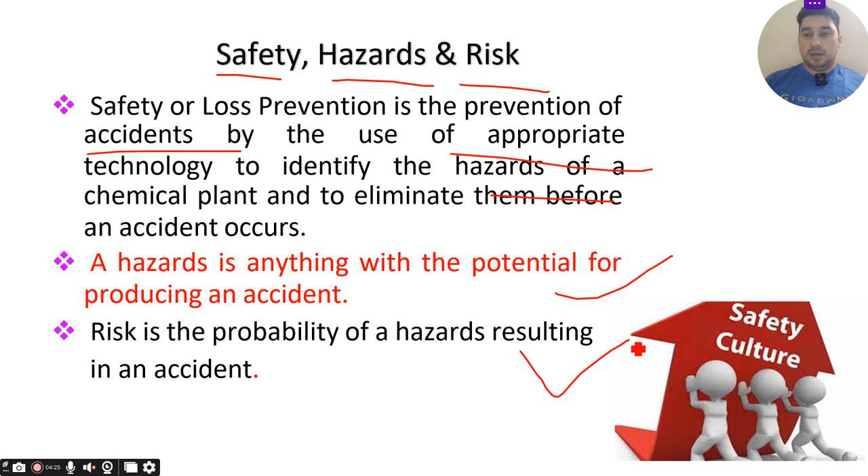In process safety management, hazard identification is very important. If you will not identify the hazard, then your process safety management will totally fail. So hazard identification is very important.

In process safety management, hazard identification is completely different from other industries like construction or aerospace. Hazard identification here refers to an inherent physical or chemical characteristic that has the potential for causing harm to people, environment, or property. Inherent means anything that, by its nature, by itself, is a hazard. So hazards are intrinsic to a material, or to its conditions of use.

Let's understand this with examples. First, inherent hazards like hydrogen sulfide. By nature, hydrogen sulfide is a toxic gas - when you inhale it, it's toxic. So by nature, it is hazardous. Second, moving machinery and equipment - by nature these have kinetic energy and pinch points, making them hazardous.

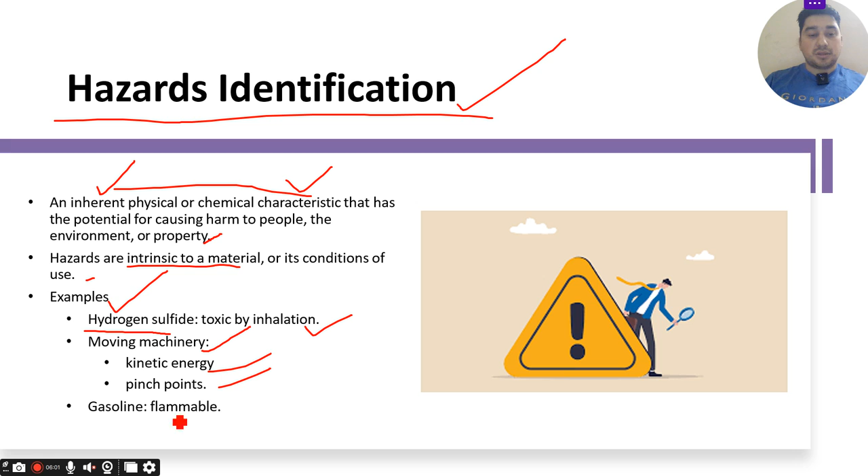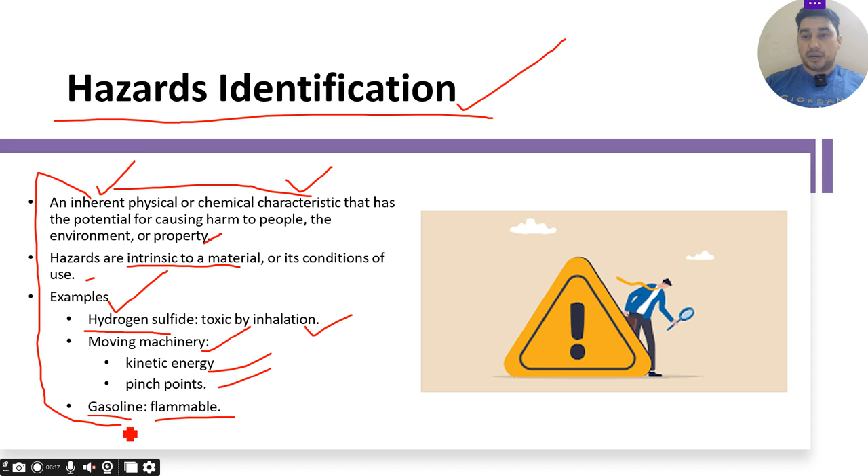Third, we have gasoline - by nature, it is flammable. So anything which is hazardous by nature is called an inherent physical or chemical characteristic that has the potential for causing harm to people, to the environment, and to property. That's called inherent hazard.

Whenever we do any process safety management related process, any industrial process, there are some questions you need to ask, and you need to be very specific about what you are asking, where you are asking, and how you are asking these questions related to the process. The first question is: what are the hazards? So you have to do the hazard identification, then answer these questions.

Once you identify the hazards, you have to understand the process - you have to read the process, you have to walk the process. Then you answer: what can go wrong and how, related to the process design and production process. Then, what are the chances, the likelihood, and the consequences? What are the chances the production process or equipment will fail? If this failure happens, what are the consequences - whether low, medium, or high?

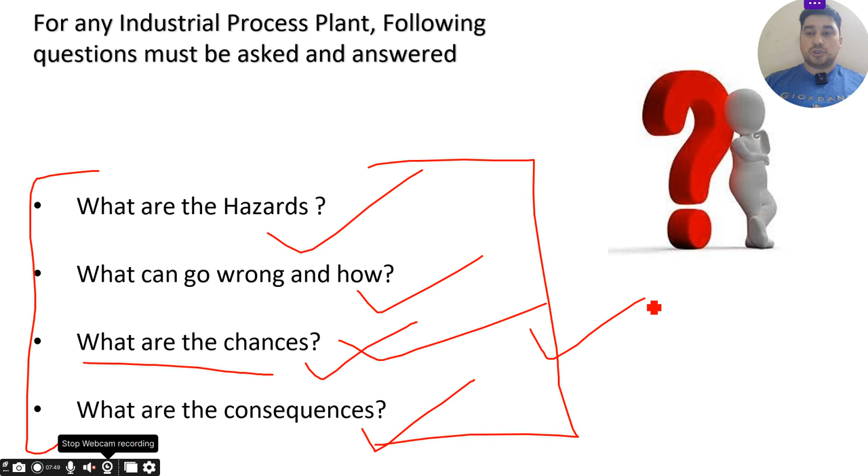Only then will you identify the answer to what the consequences are. So these are the four main questions you have to ask during process safety management - when doing any study related to process safety management, you have to get proper answers for these questions.

In process safety management, you also have to do a what-if analysis. Whenever you do this process safety analysis, you have to do it as a team - a single person can't do this. Just as with investigations or developing SOPs and manuals, you need a team, because you need expertise from different departments to give their inputs, ideas, and suggestions. Only then will you do proper documentation and process analysis. So in the what-if analysis, done by the team, you have to ask the questions and answer them too.

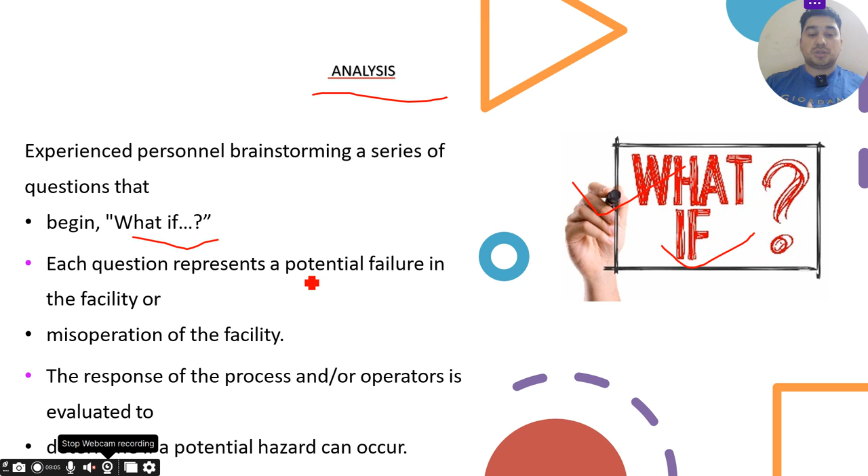You begin with 'what if.' Each question represents a potential failure in the facility, or misoperation of the facility or equipment failure, and the response of the process or the operator is evaluated. These are the things asked during the what-if analysis, in this way, whenever conducting one.

Related to equipment failure, you can ask: what if a valve leaks? What will happen? You have to go forward and ask different questions - what if the valve fails? If the valve leaks, what will happen? What are the consequences? What are the hazards? What are the risks? Those are the things you have to ask.

Moving forward, for human error related questions you can ask: what if the operator fails to restart the pump? What is the risk? What is the consequence? What is the likelihood and the severity?

All these things you have to check, and what control measures are in place already. Then the external events also you have to consider whenever you are doing the what-if analysis. External events are where you have very limited control or no control at all. So those are the external events.

So you can ask, what if a very hard freeze persists? If there is a snowfall, what will happen? If there is very high rain, if there is any flood, and that flood water went into any chamber, any pump, or any different kind of tanks, what will happen? So those things you have to check also.

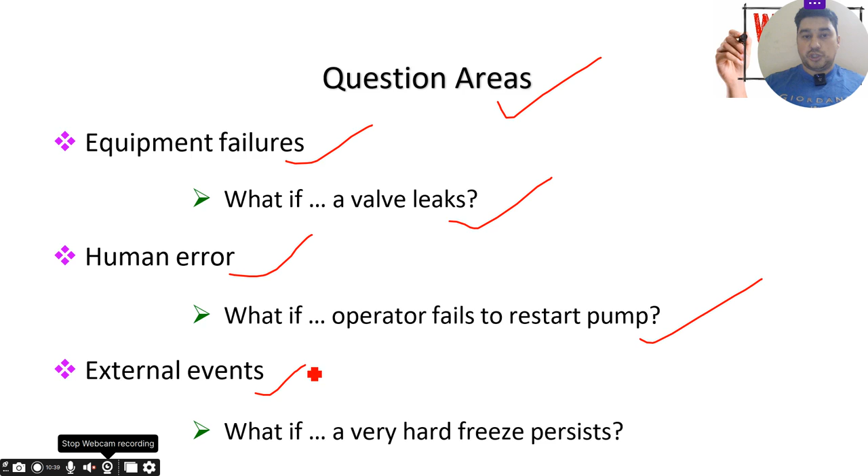So when we do the what-if analysis, it's related to the material, such as what if the raw material contains impurities, that also you have to ask. Then what if cooling water is lost? What if the vessel agitation stops? What if power supply fails? What if the temperature or pressure sensor fails? And what if the pump stops?

These are the questions you can ask in process safety management whenever you are conducting the what-if analysis. You have to gather as many questions as possible. The more questions you gather from the different teams, the safer your process will be. It will give you more shield and protection from the hazard and the risk related to process safety. So do not avoid the questions, get as many questions as possible. That is the key.

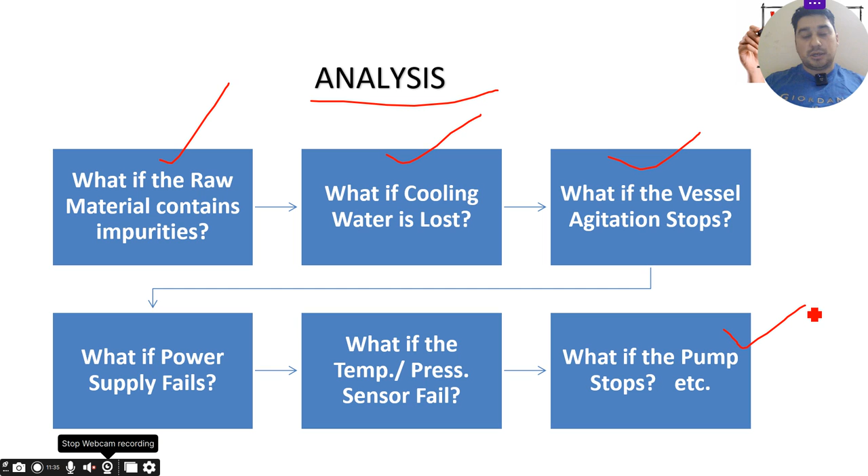So when we are conducting the what-if analysis, there are certain steps that you have to follow. First of all, divide the system into smaller logical subsystems. Why do we have to divide it? Because when you do the whole thing at one time, it will be very difficult. People will lose their scope, they will lose the goal of what they are actually trying to achieve. So that's why divide the things into different parts.

First try to solve one part, then move to the second, then the third and the fourth. In that way the work will look smaller, it looks easy, and people will interact also. So that's why we have to divide the system into smaller logical subsystems. After that, you have to identify the list of questions that you want to answer for that particular subsystem. Then you have to select the questions you want to take related to that particular system.

Then you have to identify the hazard. Then you will identify the consequences, severity, likelihood, etc., other things related to your process and the system. Once you identify all these things, you have to provide the control measures and recommendations to avoid such risk. Repeat steps 2 through 4 until complete. So from step 2, identify the list of questions, until step 4, until it is completed. For every process you have to repeat the same thing.

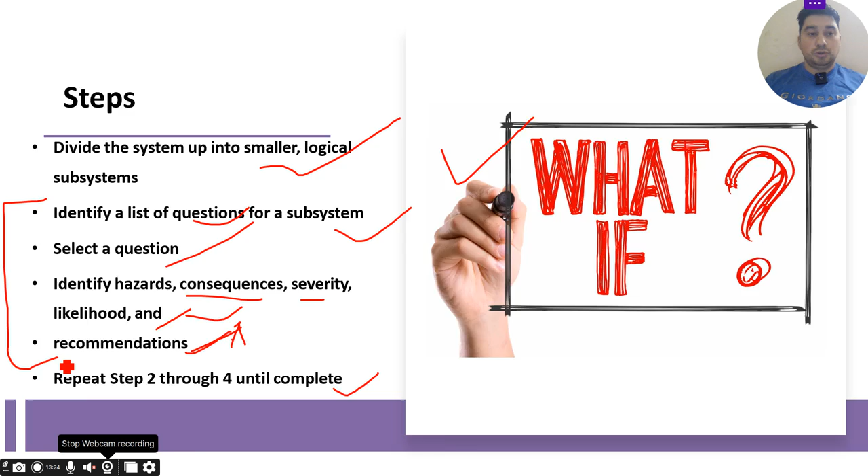HAZOP study is one of the main things that we have to conduct in process safety management. If you do not conduct the HAZOP study, then sorry, the process safety management is going to fail, and it will not work on the ground. So first of all, let's go to the definition. What is HAZOP, and what is the HAZOP study? So HAZOP, first of all, stands for haz...

Okay, HAZ means hazard, OP means operability, and study means study. So hazard and operability study is the full form of HAZOP. HAZOP study is a structured, systematic technique to identify the potential hazards related to operation and operability problems in industrial processes, particularly in oil and gas, chemical, pharmaceutical, manufacturing industries, and refineries. So there you can use this HAZOP study to identify potential hazards and operation-related problems in the industrial process. So that is the HAZOP study.

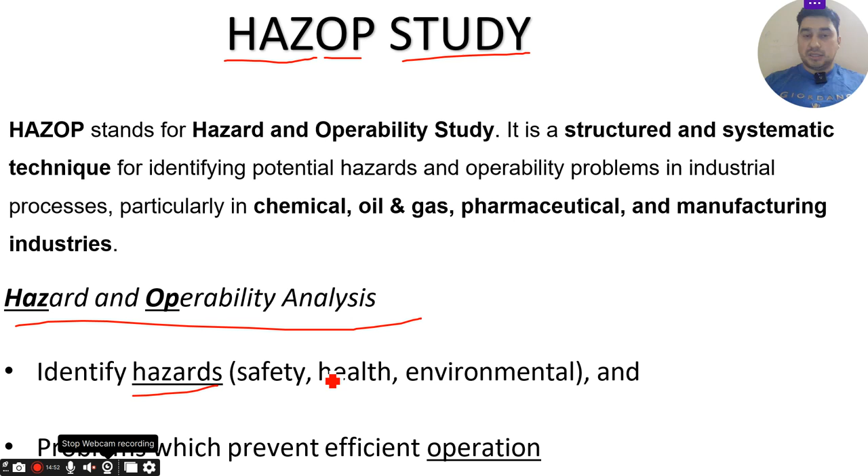So we have to conduct the HAZOP analysis also. In that one, we have to identify the hazards. The hazards will be related to safety, health, environment, and problems, which prevent efficient operation. So this study is related to the hazard. We have to conduct these things.

Safety programs. Safety regulations require some ingredients to have a proper safety program. Otherwise, the safety regulations and safety programs will not work. First of all, the persons working in process safety management should have proper knowledge. Let's say you are identifying a team and that team doesn't have any knowledge. They don't know anything about process safety, design, or maintenance, then sorry, you have selected the wrong team. Go again and select the proper team who has proper knowledge about process safety. Otherwise, don't select that particular person.

Then the person should have at least a basic understanding of safety. They should have safety experience also. That team member should be in your hazard study team. Then technical competencies you also have to get. A competent person should be there. Only the safety personnel cannot do the hazard study or process safety management, because the safety professional doesn't have the technical knowledge, information, and experience. That's why you have to get the technical person.

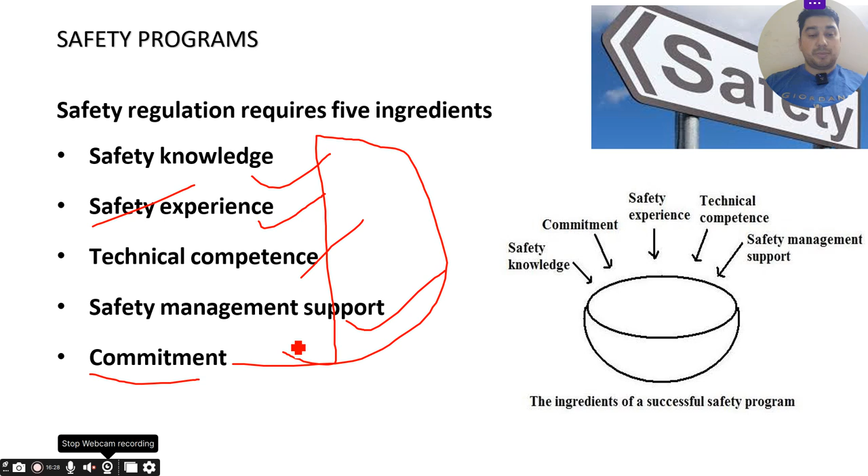Then safety management support also. You must get the safety professional in the process safety management. Then commitment, which is required from every person. If the commitment is not there from everyone, then your process safety management will fail. Nobody will work on it.

There are some scopes under the elements of process safety management. We have to make sure that we are compliant with these scopes. First of all, employee participation is required, very, very important. Each and every employee should participate. You have to get the view from each and every person. Only then will you get the actual picture of process safety management. Then process safety information also needs to be provided. Process hazard analysis: as I informed you, the what-if analysis or hazard study that we have to conduct. Operating procedures should be there. Then training needs to be provided for each and everyone.

Contractor safety also needs to be checked. If you do not include contractor safety in process safety management, then contractors might cause accidents and incidents that will not be controlled by process safety management. That's why I include them also. Pre-startup safety review is very, very important. Before starting any process, any machinery, anything, the pre-startup safety review is very, very important.

Then mechanical integrity and hot work permits. Every hot work should be controlled by a permit. I hope you remember the Piper Alpha incident, where the permit was not handed over to the second shift properly, and then the major incident happened over there.

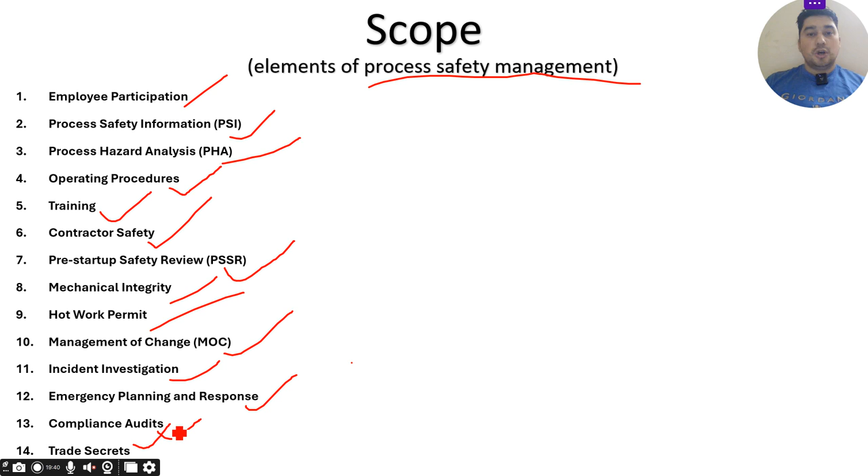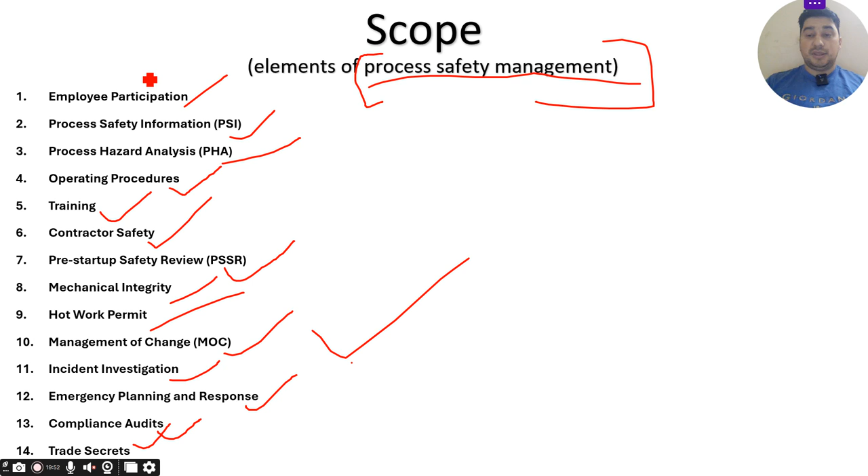So these are the scopes that we have to cover under process safety management. Okay, so when you are doing any process safety management, make sure you are not leaving any single point from these 14 points. These 14 points you should include under your process safety management scope. It's very, very important.

Features and characteristics of management system for process safety. Okay, first of all, planning is very, very important. Well defined goals and objectives you have to set before starting any process safety. You have to make sure of consideration of alternative achievement mechanisms, well defined inputs and resources; those requirements should be identified. Identification of needed tools and training, that you have to do under the planning section. What are the things you require to have a successful process safety management, that you have to do under the planning.

Then once you plan, you have to make detailed work plans, specific milestones for accomplishments, initiating mechanisms. So you have to implement those things. Once you implement that, you have to have strong organizing: a strong sponsorship, clear lines of authority, who will do what, what authority they have, what roles and responsibilities they have, such as a JD. So a separate JD you have to create under the process safety management, for what they will do.

Then explicit assignment of roles and responsibilities: what they will do, how they will control, whom they will report to; everything should be there in their roles and responsibilities. And the internal coordination and communication: how there will be internal coordination and communication, whom they will communicate with, whom they will coordinate with; everything should be included in that.

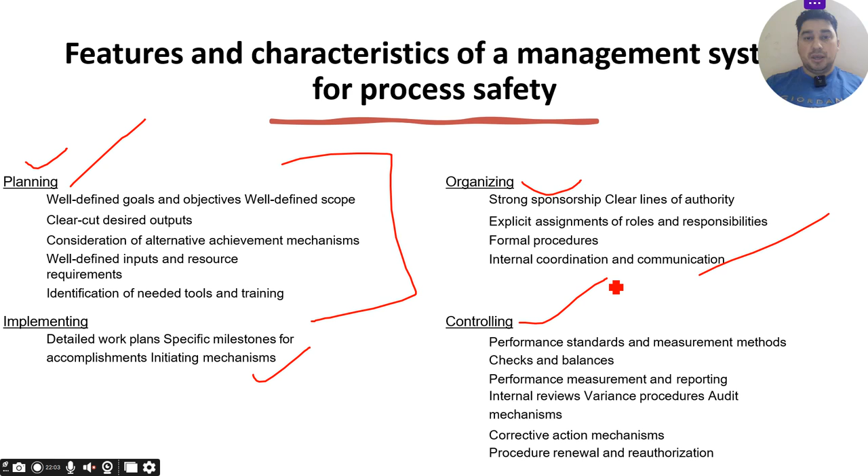After that, at the end, you have to control this full process. How are you going to control this? Performance standards, measurement methods, check and balance, audits, inspections, safety reports, third party audits, second party audits, performance measurement and reporting, internal audits, KPIs; so many things could be there. Corrective action, preventive actions, and procedure renewal, reauthorization. So by these four things, planning, implementation, organizing and controlling, you will control the process safety management.

So safety programs are related to chemical disaster. There could be two different types: one is biotic environment and the second one is abiotic environment. When there is a chemical disaster related to the biotic environment, it will cause death to humans, livestock and plants. These three things will be affected: death, injury, disease and disability.

You remember the Bhopal methyl isocyanate gas tragedy, which happened in 1984. There, you have seen that there was death of humans, there was injury also, and there was disease also, which is still there. Humans died, livestock died, plants also died. It is related to the biotic environment.

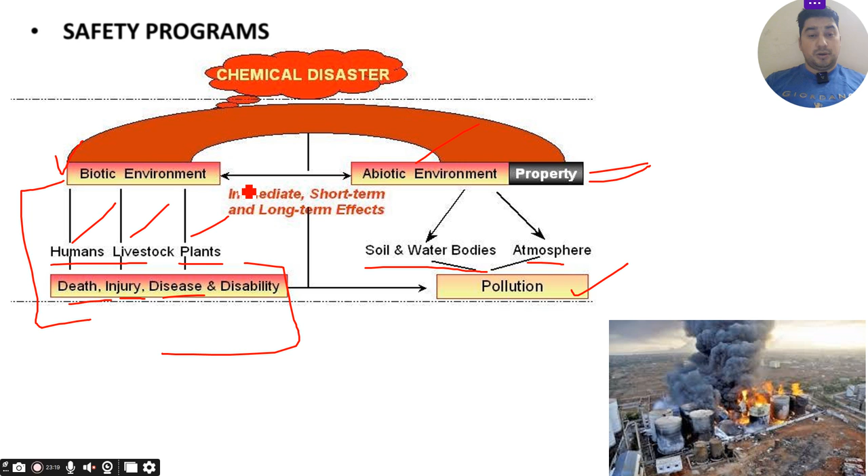Then we have the immediate abiotic environment. It will only cause hazard to properties such as soil, water bodies and atmosphere, and it will cause pollution only. So for the biotic environment, immediate short term and long term effects could be there. Okay, biotic and abiotic both.

So there are so many incidents and accidents, but before any incident or accident, each and every person thinks that yes, we are safe and nothing will happen to us. But there are so many incidents in history which taught us that no, we were wrong, and we haven't controlled our risk and hazard properly related to process safety, and that's why it caused so many incidents in the past, and which is still going on.

So good companies can be lulled into a false sense of security. As I told you, they can have misperceptions that yes, my safety system is very good, up to the standard, it is top notch, and nothing will happen to us. So that is a false sense they have.

So that is the main cause of incidents and accidents, when people don't accept and when they don't go deep to investigate or try to find out the problems in the system. Then they may not realize how vulnerable they are to a major accident until it has happened. As I told you, until it has not happened, everyone thinks that it is safe and nothing is going to happen to them. So subsequent investigations typically show that there were multiple causes, and many of these were known long before the event.

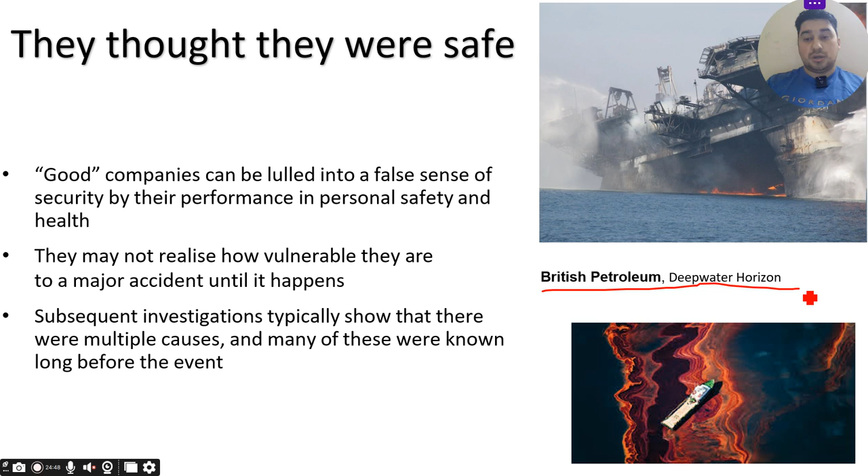You remember British Petroleum Deepwater Horizon? That is one of the major oil spills, and there were so many accidents there. So you can see this one.

Why and how does defense fail? This is a very, very important question. So people often, as I told you, assume that systems work as intended despite warning signs. They don't take care sometimes. Examples of good performance are cited as representing the whole, while the poor ones are overlooked, or soon people forget it. They will not learn the lesson.

Okay, lesson learned is very, very important from the past. Past has taught us so many things, but still people forget about their past. Analysis of failure modes and effects should include human and organizational aspects, as well as equipment, physical, and IT systems. So that should be included in the defense system.

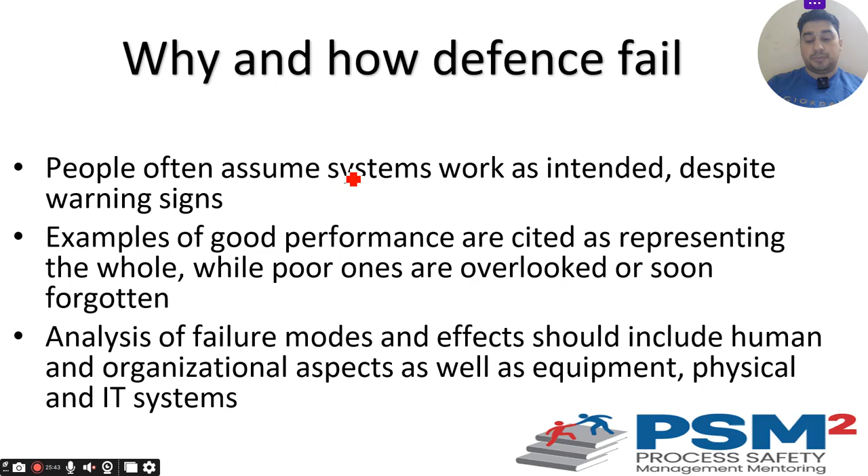So process safety management means recognition of seriousness of consequences and mechanisms. That is very, very important, which we have to identify during process safety management. And many of the key decisions influencing safety may be beyond the control of the worker or even the site. They may be made by people at another site, country, or organization. So this is a typical problem in safety.

Sometimes people conduct risk assessment in one site and implement that risk assessment in a different site. So that can also happen in process safety. People can sit in different offices, different areas, and do the process safety management, design, evaluation, and so many other things. So that is a very, very wrong thing that should be avoided.

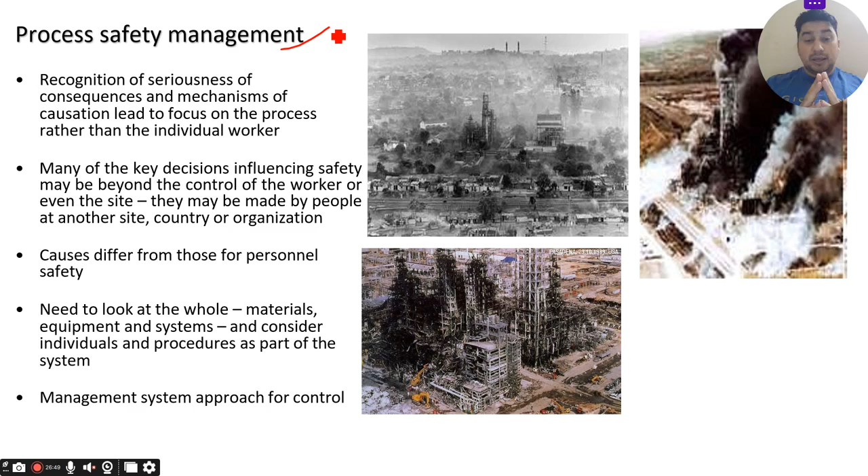So it will differ from personal safety, and we need to look at the whole. You should not look at only one thing in process safety. You have to look at everything: material, equipment, systems, people, everything. Then a management system approach for control needs to be implemented to control process safety related hazards.

The most effective means of implementing a safety aspect is to make it everyone's responsibility in a process plant. Not only one person should take responsibility for process safety; each and every person should take their own responsibility. They should own the safety. So the culture needs to be changed.

Very, very important. The older concept was identifying a few employees to be responsible for safety—that is not going to work. So you have to make sure that all employees have the responsibility regarding safety, process safety. Everyone should take the responsibility, and it is very, very important to recognize the distinctions between a good and an outstanding safety process.

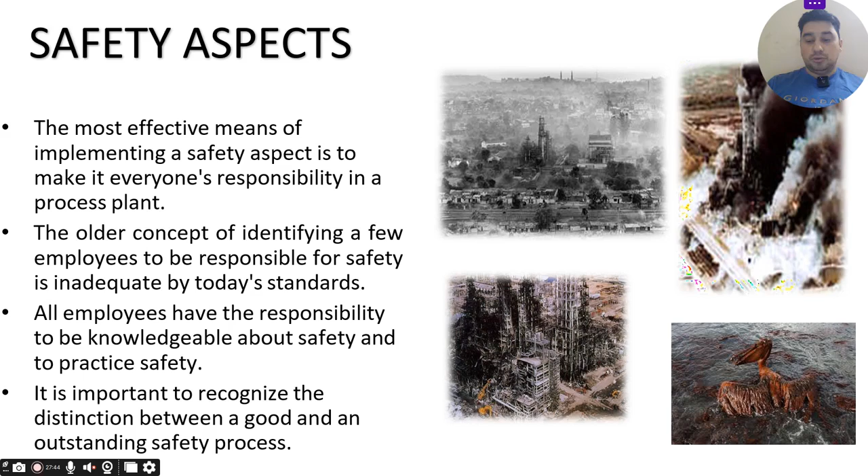Only good is not enough, we have to go for outstanding. That is what we have to do under safety aspects. A good safety process identifies and eliminates existing safety hazards. An outstanding safety process has a management system which prevents the existence of safety hazards.

This is the difference between good and outstanding safety process. A good safety process will identify and eliminate existing safety hazards. That is good safety practice. But if you want to achieve an outstanding safety management system, it will prevent the existence of safety hazards in the first place, avoiding them entirely. That is the key difference.

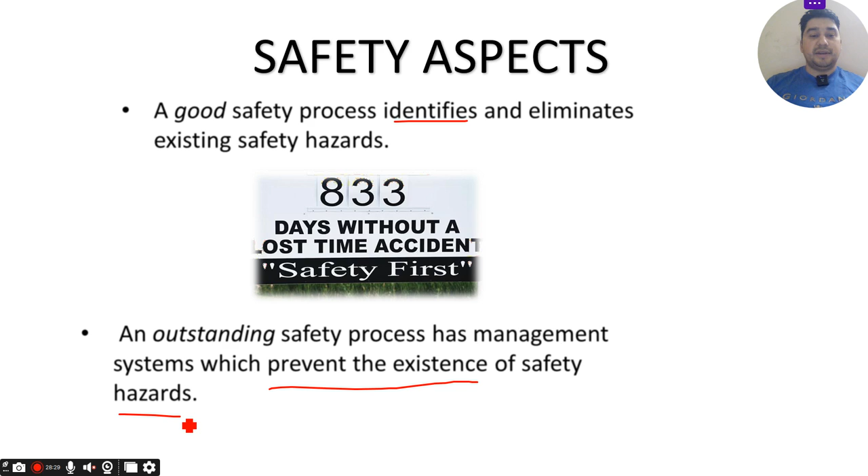Process safety is related to inherent safety, as I told you, related to inherent hazards. Then hazard identification and risk assessment need to be done. So these three things are included in process safety.

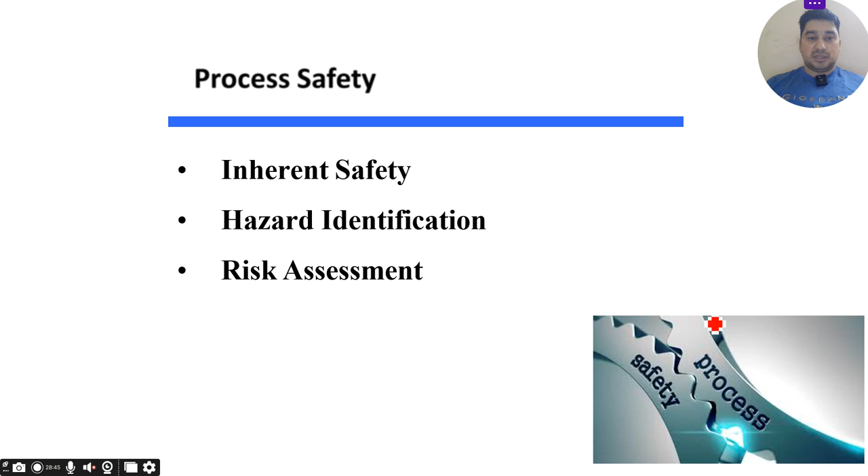Inherently safer process means reduction or elimination of hazard related to the process. This reduction or elimination is permanent and inseparable from the process, which is very important under inherent safety. For example, use a less toxic raw material to produce a product rather than using a highly toxic or highly flammable one.

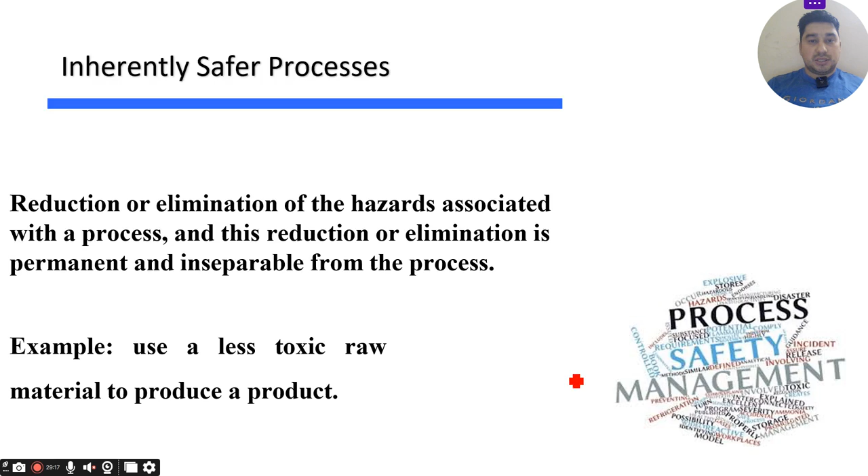So substitution is what you have to get under the inherently safer process. You have to make the process safe—inherently safer process you have to do. I hope you remember about the hierarchy of control.

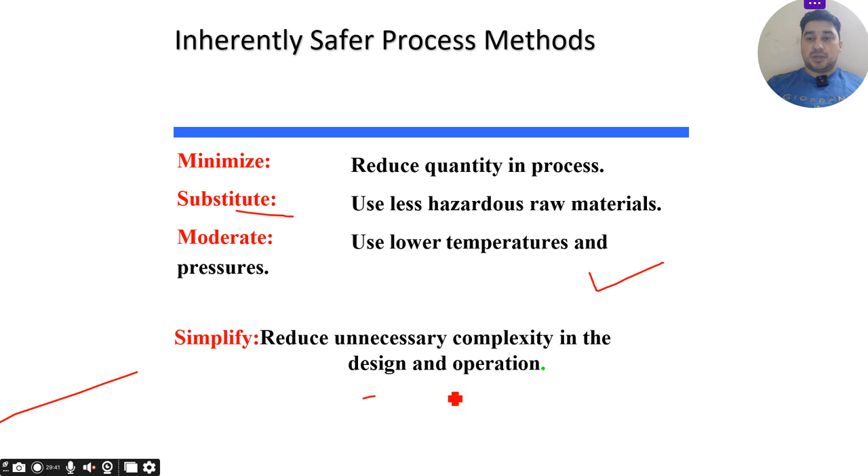Similarly here, we have to minimize, reduce quantity in process. Then substitute, use less hazardous raw material; moderate, use low temperature and pressure. Then simplify, reduce unnecessary complexity in the design and operation. These are the kinds of things we have to use in inherently safer process methods.

Then we have hazard identification versus risk assessment procedures. Hazard identification methods remain similar in type. We have to use the process hazard checklist under process safety, conduct a hazard survey, do a hazard study like hazard and operability study, and conduct a safety review.

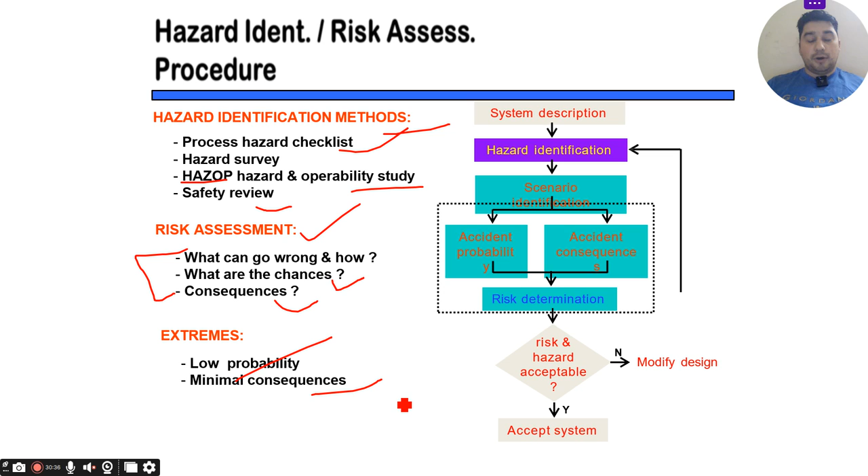When conducting risk assessment, you have to ask: what can go wrong, and how? Remember these questions asked earlier. What are the chances of those things going wrong, and what are the consequences? You have to check that under risk assessment. For example, low probability with minimal consequences could be one case. You can check it this way also.

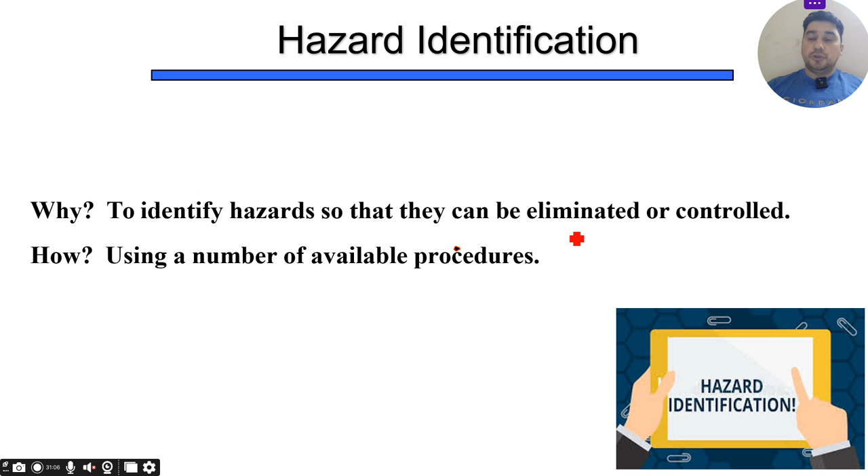Hazard identification is very, very important. But why is it so important? If you will not identify the hazard, what will you control? Simple question, right? If you will not identify the hazard, you will not control the accident or incident. That's why you have to identify the hazard—very important—so that it can be eliminated or controlled. How can you identify it? Using a number of available procedures that you have.

Let's go to the accident process. Most accidents or incidents follow a three-step sequence. First is initiation—the starting process of the accident. In this stage, the accident hasn't happened yet; it is just starting.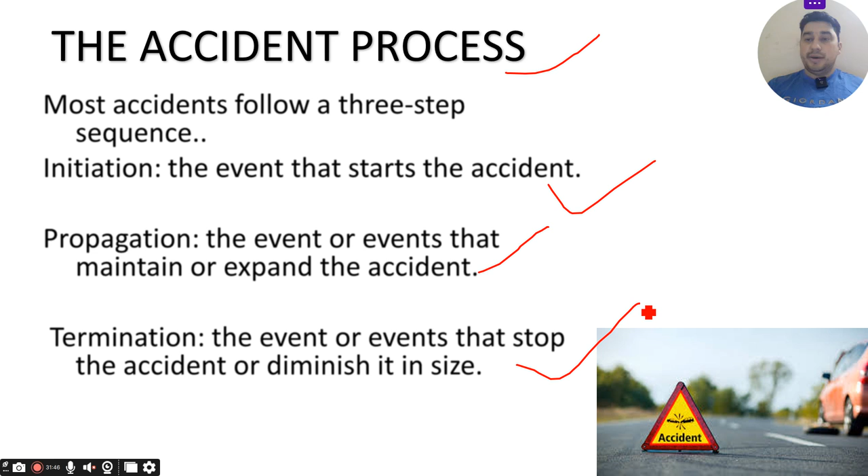The second process is propagation—the accident or event has already happened and is now progressing. In propagation, the accident will go from worse to worse. Then we have termination, where the accident stops—the event or events that stop the accident or diminish its size.

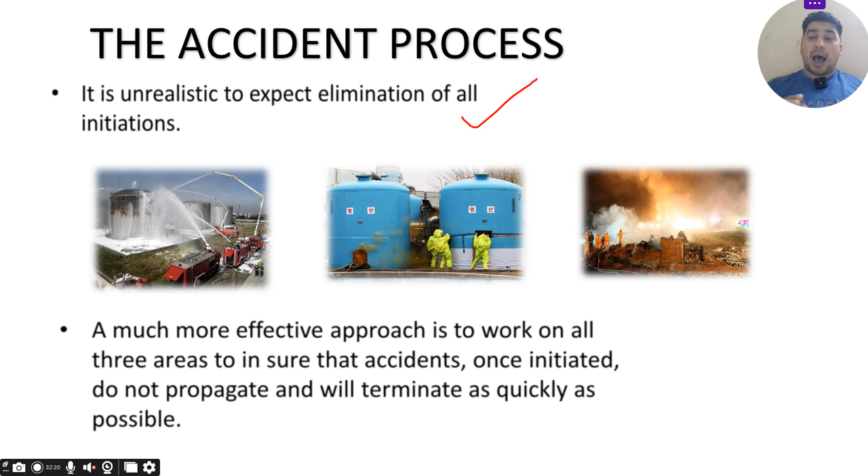In the accident process, it is unrealistic to expect elimination of all initiations—we cannot avoid all initiations. A much more effective approach is to work on all three areas to ensure that accidents, once initiated, do not propagate and will terminate as quickly as possible. All accidents cannot be avoided, but if one happens, how can you avoid it or reduce its consequences? That is the main thing we have to concentrate on.

So, defeating the accident process—do you remember the movie Final Destination? In that movie, one of the survivors of the accident tried to save people by defeating the line of death.

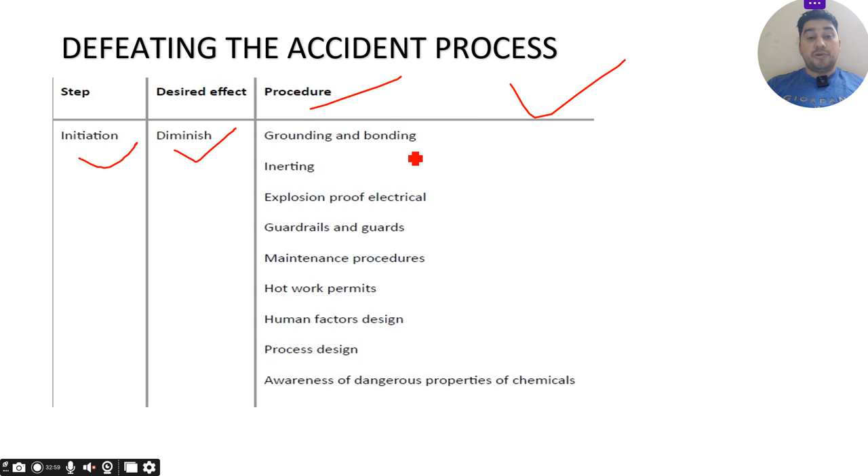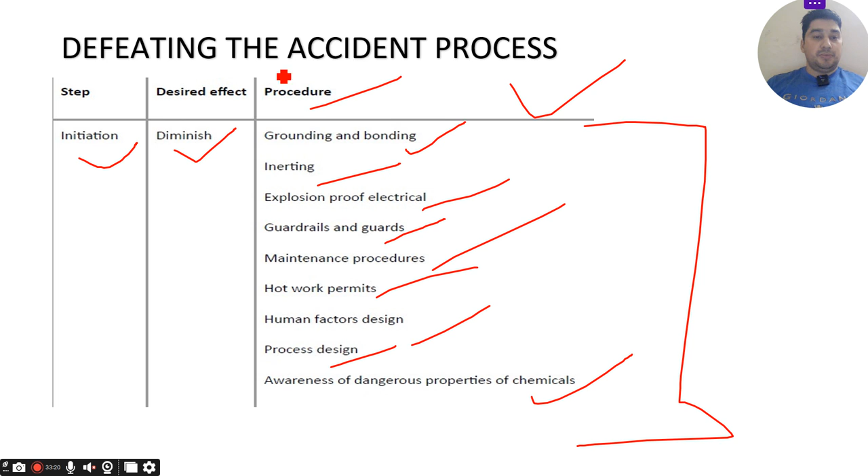So in a similar way, you can imagine here. First of all, initiation. Let's start with the initiation process. The desired effect is to diminish it. So the procedures we can use include grounding and bonding, which is very important, inerting, explosion proof electrical, guardrails and guards, maintenance procedures, hot work permits, human factor designs, process design, and awareness of dangerous properties of chemicals. These are the procedures used in the initiation step.

Then the second step is propagation, and the desired effect is again to diminish it. Procedures for propagation include emergency material transfer - during an emergency, if there are 1,000 kg of flammable gases in a store, how do you remove them safely. Also reduce inventories of flammable materials, equipment spacing and layout to segregate equipment so one hazard doesn't transfer to another, non-flammable construction materials so fire doesn't spread, and installation of check and emergency shutoff valves. These are steps you can implement during propagation so the accident doesn't get worse or spread further.

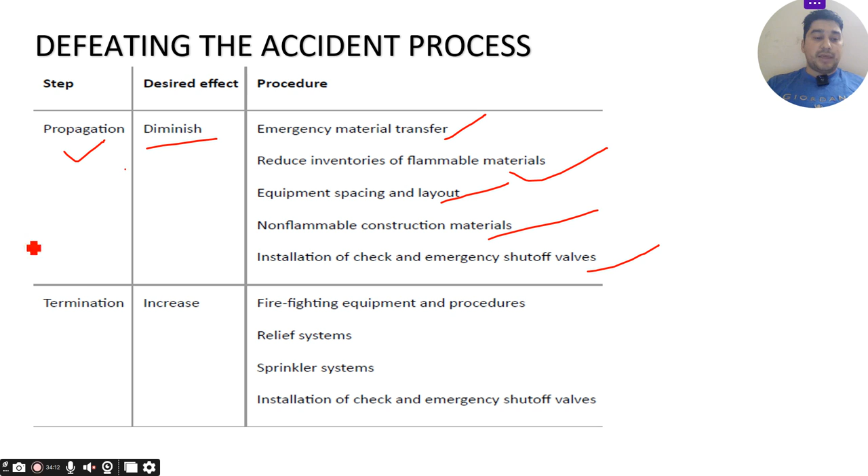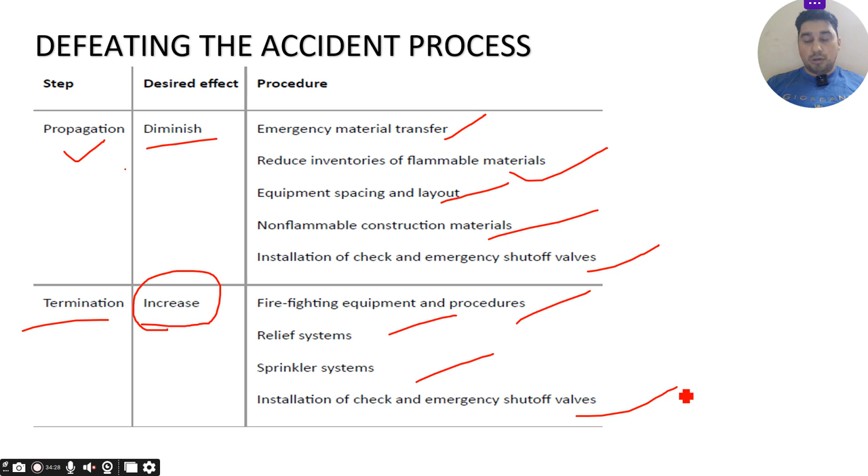Then we have termination. The termination effect needs to be increased. Termination means avoiding or stopping the accident - firefighting equipment and procedures, relief systems, sprinkler systems, and installation of check and emergency shutoff valves, which act during an emergency to stop any fire or emergency at that time.

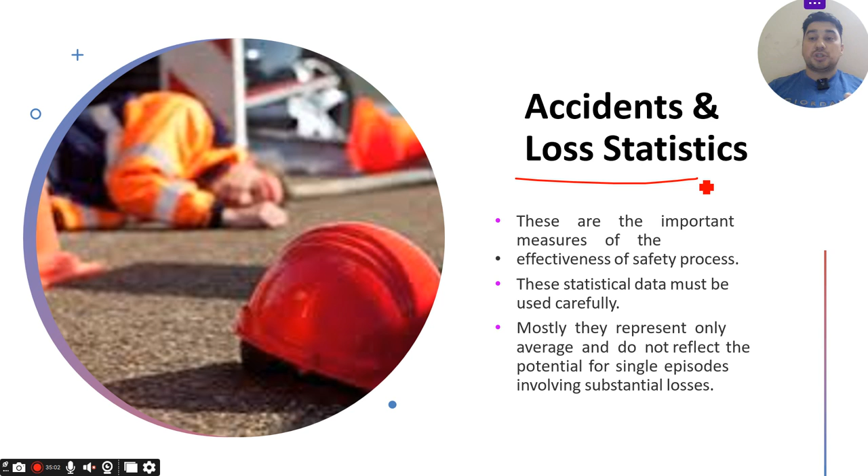Accident and loss statistics are very important. As I told you, we have to look at the past accidents and statistics - these are important measures of the effectiveness of a safety process. These statistics and past accidents can teach you many things, so we need to look at them carefully and identify them. Mostly they represent only averages and do not reflect the potential for a single episode involving substantial losses. You have to keep that in mind.

So how do you get accident and loss statistics? There are measure systems such as OSHA incidence rate, fatal accident rate - we have to count these too - and OSHA fatality rate, or deaths per person year. These are statistics we have to count as well. There are also some different statistics in the HSE, which I will talk about in a separate video that I will upload on my channel.

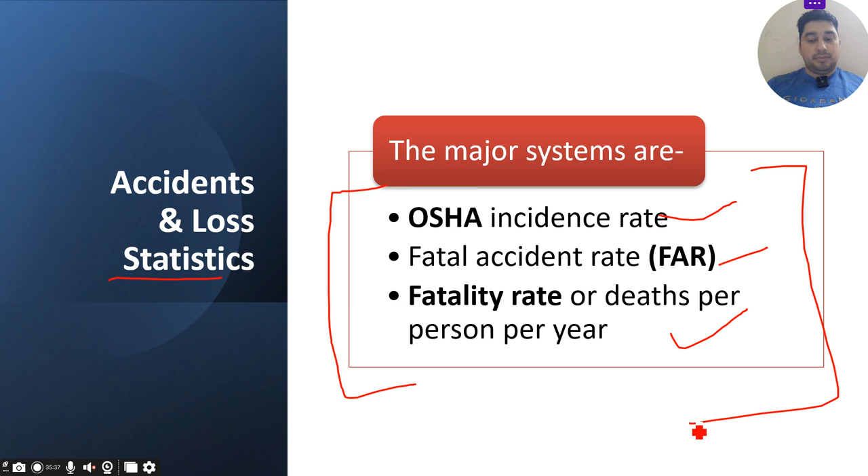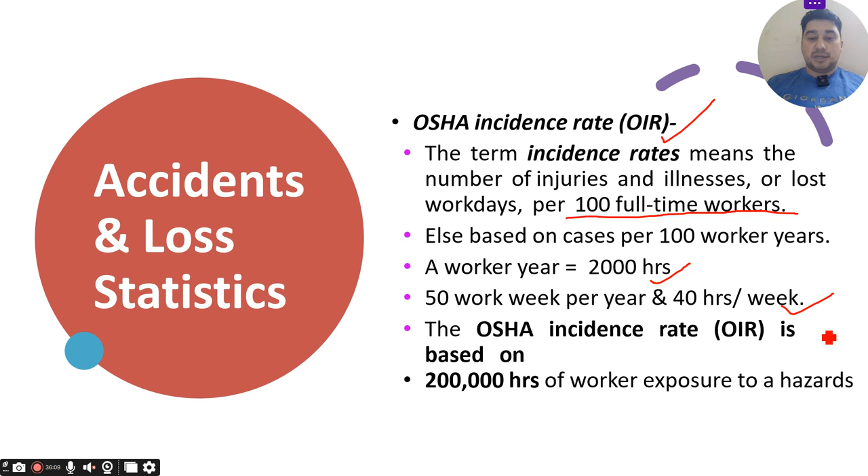Accident and loss statistics: OSHA incidence rate - if you are under OSHA regulations, the term incidence rate means the number of injuries and illnesses or lost work days per 100 full-time workers. OSHA calculates this per 100 full-time workers, based on cases per 100 worker years, with a worker working 2000 hours - that is 50 weeks per year times 40 hours a week. That's how you calculate the OSHA incidence rate, normally based on 200,000 hours of worker exposure to hazards.

Accident and loss statistics: how you calculate the OSHA incidence rate - you need the number of occupational injuries and illnesses, and the total number of employee hours worked during the applicable period.

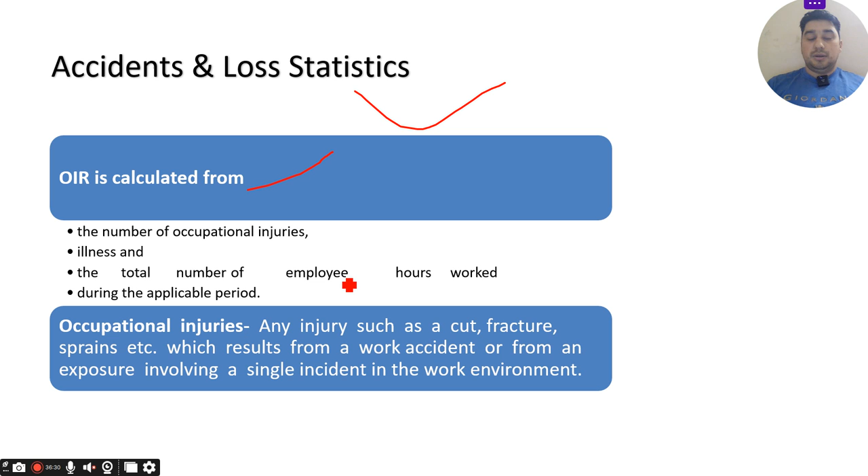Accident and loss statistics - in the same way, you have to calculate occupational illness. An occupational illness is an abnormal condition or disorder other than one resulting from occupational injury, so that has to be calculated under occupational illness. Occupational illness includes acute and chronic illness and disease, which may be caused by inhalation, absorption, or direct contact with any kind of hazard or chemical.

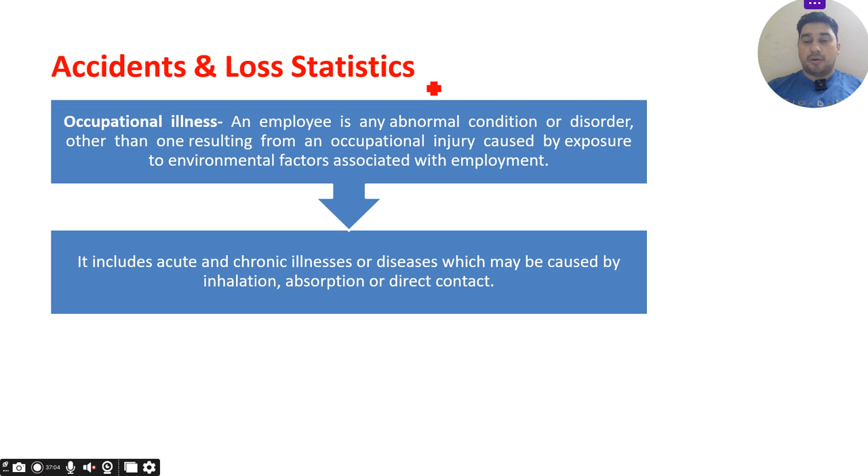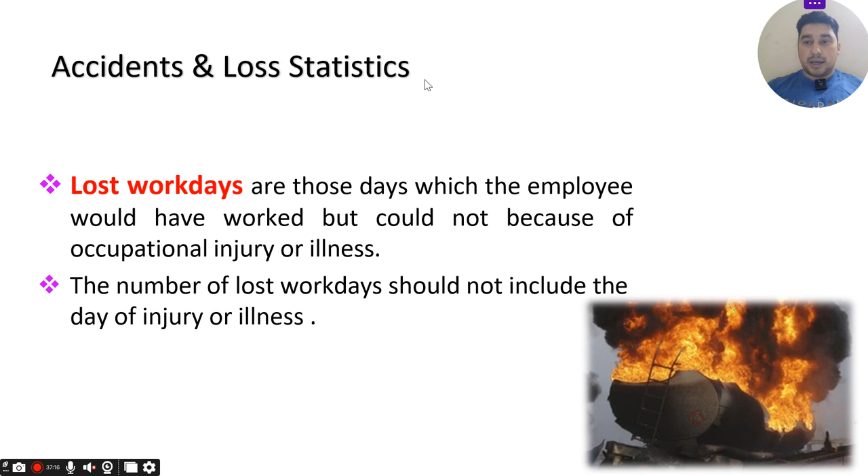Lost work days are those days on which employees did not resume their work or did not come to work - these days are calculated as LTI, or lost time injury. Lost work days are the continuous number of days, consecutive or not, on which, because of injury or illness, the employee would have worked but could not. If the employee was assigned to a temporary job - for example, transferred to another area instead of their usual section - that will not count as lost work days, because the person is still there in the factory or organization. So as long as the person is working under the organization, physically available, or working from home, it will not count as lost work days.

There are also recorded cases in accident and loss statistics, as well as non-recordable cases, including those involving only one-time treatment.

Non-fatal cases without lost work days are cases of occupational injury or illness which do not involve fatalities or lost work days, but did result in transfer to another job, termination of employee, medical treatment other than first aid, diagnosis of occupational illness, and restriction of work or motion. These will be calculated as under the non-fatal cases without lost work days.

OSHA incidence rate is based on the injury and the illness. Occupational illness rate: as I told you, number of injuries and illness, and you have to multiply by 200,000. In that way you have to calculate.

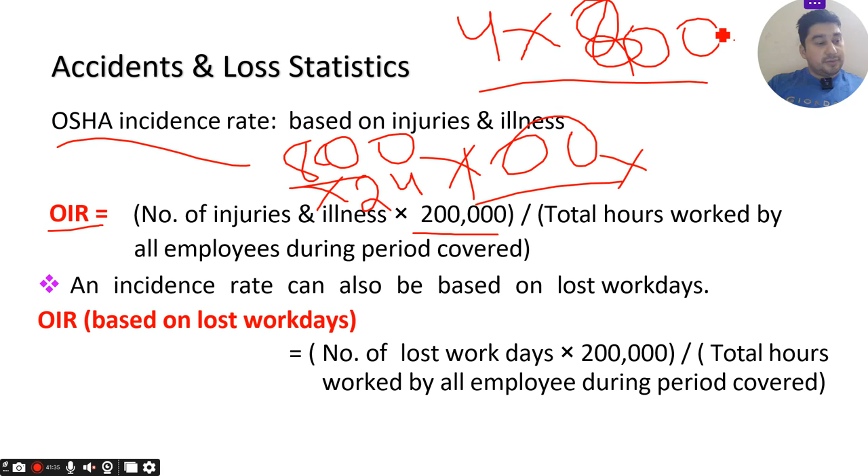So let's divide this into 800,000... it will come somewhere around 3. So in that way you have to calculate the injury rate.

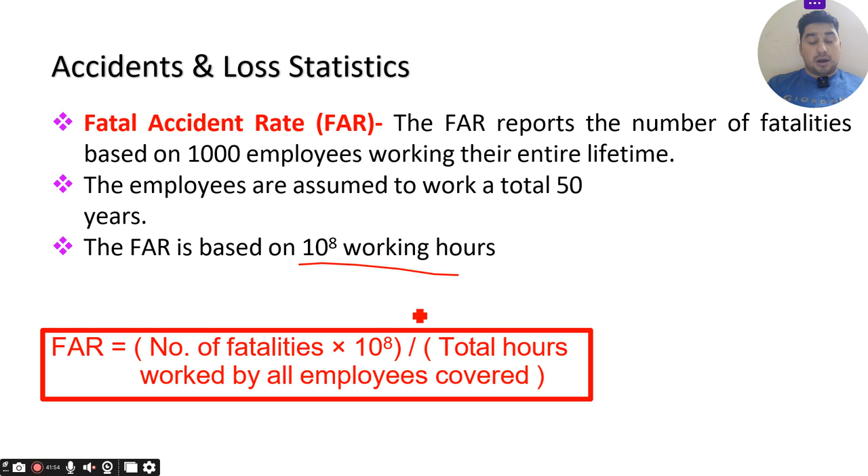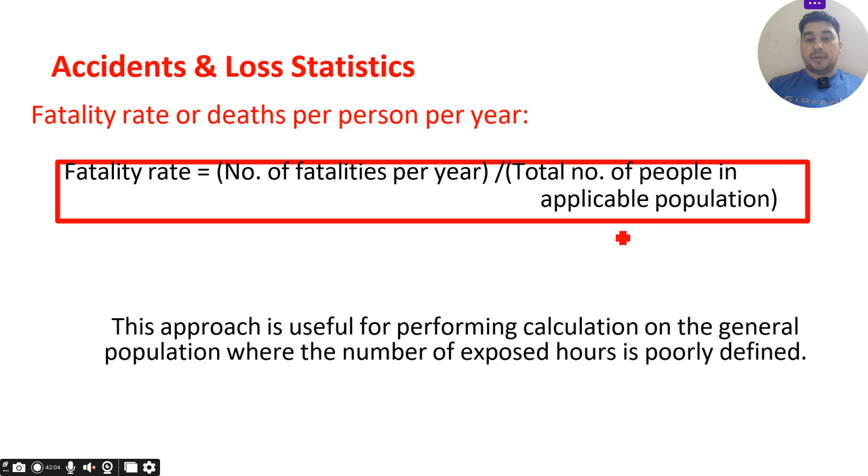Fatal accident rate is also calculated in the same way, based on number of fatalities. The fatal accident rate is based on working hours - the number of hours they are working, and total hours worked by all employees covered. So this formula you have to use: fatality rate equals number of fatalities per year divided by total number of people in applicable population. In that way you have to count it.

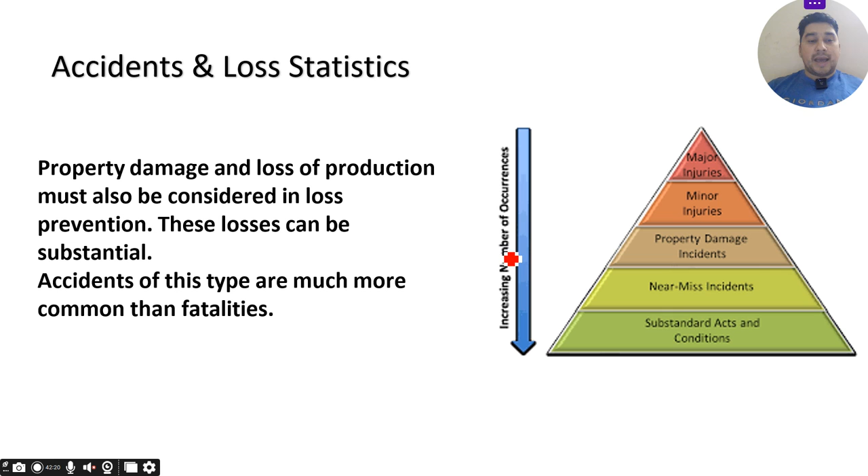Accident and loss statistics - property damage and loss of production - must also be considered whenever you are calculating these things, and these losses can be substantial. Accidents of these types are much more common than fatalities. The exact numbers when calculating any statistics could vary as per the accident, as per the industry, location and time.

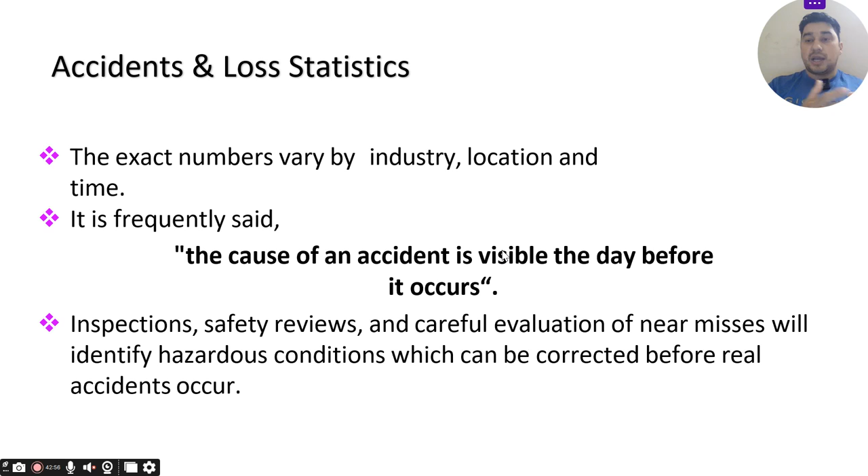It is frequently said that the cause of an accident is visible the day before it occurs. So before any accident or incident occurs, there could be signs or indications. Inspection, safety reviews, and careful evaluation of near misses will identify hazardous conditions which can be corrected before any accident or incident. These give you the signal, and these are the control measures.